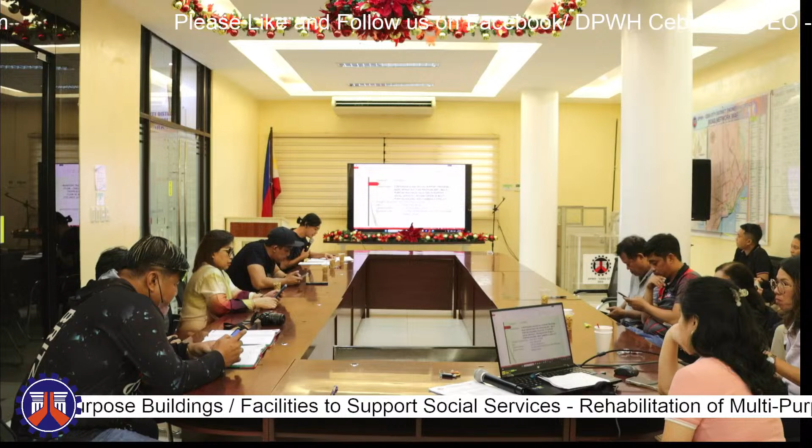And for the BAC TWG head, we have Evelyn C. Mansueto. TWG members: Francis C. Cañete, Elvira C. Fernandez, Kini Luis D. Mansueto, Marcelino S. Cortez, Alan M. Yaon Jr., Jimulad E. Talingting, Rinaldo B. Padillo, and Ma'am Corazon J. Amugis.

Okay, for the planning, we have Jan Silva, Jirelson Tan, Earl Anthony Yulin, Nessa Cañedo, Dayano Lasco, Nimar Tapik, Ralph Gamali, Ariel Cardosa, and Oriel Bacara.

Okay, for the participating contractors, for the construction firm, we have from Planac Construction, Mamalu Plantar. For Neo Ventures Construction, we have Sir Andrew Villeno. For the New Global Dev Corporation, we have Sir Jean Martin. Okay, that's all for the contractors.

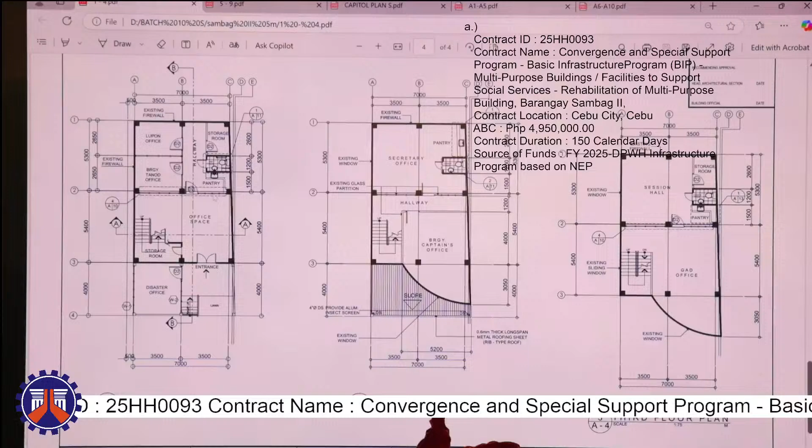For its scope of works, it contains the installation of the built-in cabinet at the ground floor office space, and installation of wall partitions at the ground floor, second floor, and third floor level. Next is removal and replacement of ceiling, incorporating electrical works, and then removal and replacement of CRs, all CRs from ground floor to third floor. And then extension of the second floor level for the Barangay Captain's Office.

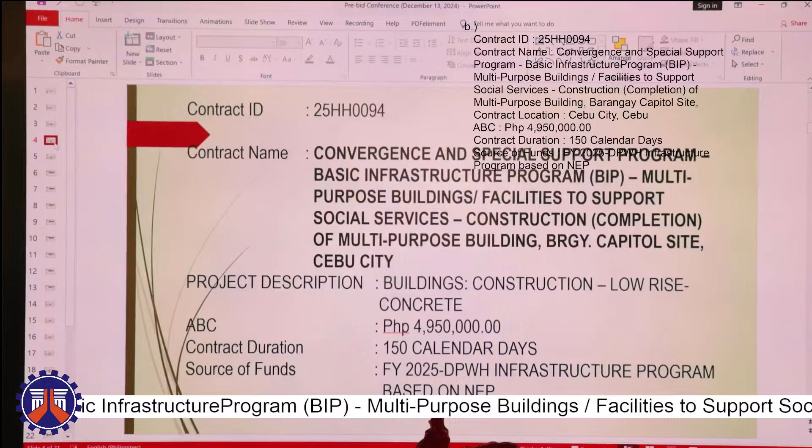So that's all for Barangay Sambag Dos. Next project, contract ID 25HH0094, with contract name Convergence and Special Support Program, Basic Infrastructure Program, multipurpose building facilities to support social services, construction completion of multipurpose building, Barangay Capitol Site, Cebu City. Project description, building construction, low-rise concrete, with approved budget contract 4,950,000. Contract duration is 150 calendar days, and its source of funds will be FY 2025 DPWH Infrastructure Program based on NEP.

So the location of this project is the Barangay Capitol Site Barangay Hall. Its main scope of works: installation of aluminum frame glass doors, swing type; aluminum glass windows, sliding type; aluminum glass windows awning; aluminum glass windows fixed type; and aluminum windows, wooden doors and railings at the roof deck.

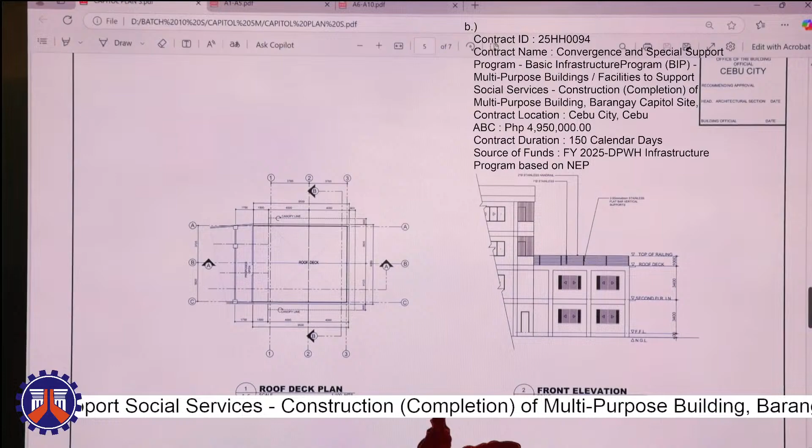So this area is enclosed. Currently it's open here, connecting to the existing barangay hall. Installation of railings at the third floor level. That's all for Barangay Capitol Site.

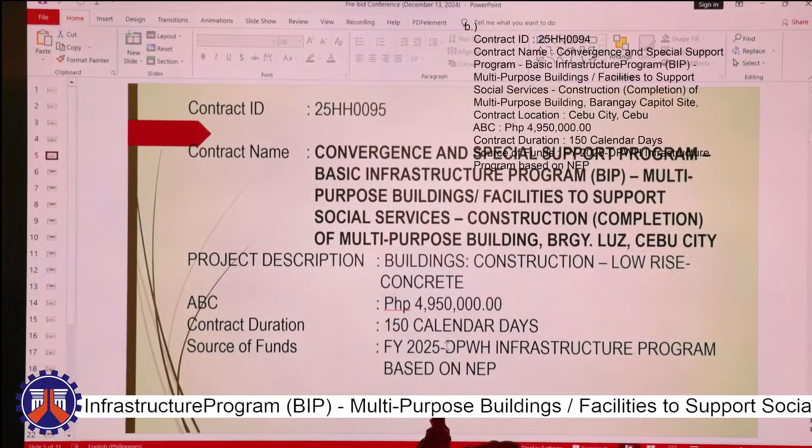Next, contract ID 25HH0095, with contract name Convergence and Special Support Program, Basic Infrastructure Program, multipurpose buildings facilities to support social services, construction completion of multipurpose building, Barangay Luz, Cebu City. With project description, construction low-rise concrete. With approved budget contract 4,950,000. Its contract duration is 150 calendar days, and source of funds will be FY 2025 DPWH Infrastructure Program based on NEP.

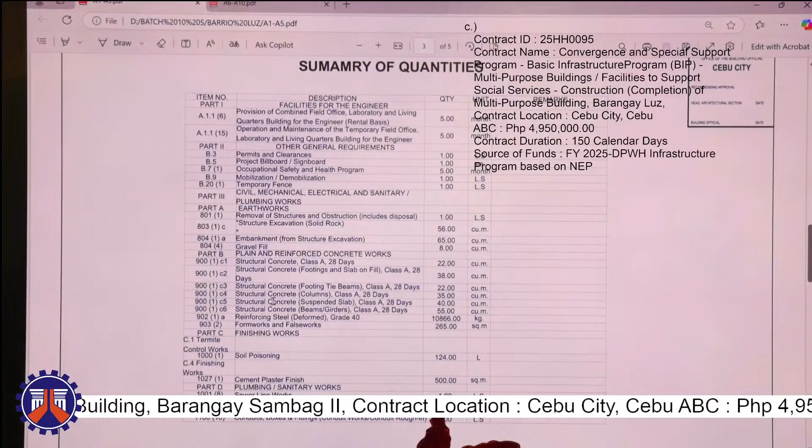For Barangay Luz, the project is located at the Barangay Luz Barangay Hall. Its main scope of works: removal of existing structures and obstruction, structure excavation, solid rock, embankment from structure excavation, and gravel fill. And for concrete works, you have structural concrete for footings and slab, structural concrete footing tie beams, structural concrete for columns, structural concrete for suspended slab, and structural concrete for beams and girders.

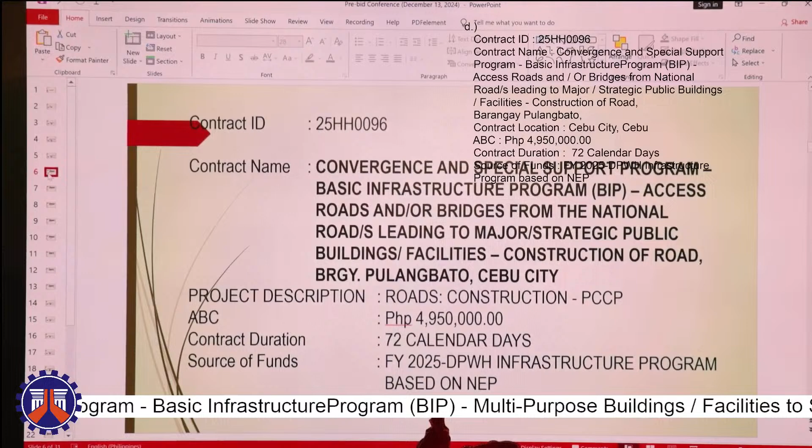Good morning. I'm here to discuss our next project with contract ID 25HH0096. Contract name, Convergence and Special Support Program, Basic Infrastructure Program, BIP, access roads and/or bridges from national roads leading to major strategic public buildings and facilities. Construction of road, Barangay Pulangbato, Cebu City. Project description, roads construction, PCCP. With the approved budget for the contract, 4,950,000. Our contract duration, 72 calendar days. Source of fund, FY 2025 DPWH Infrastructure Program based on NEP.

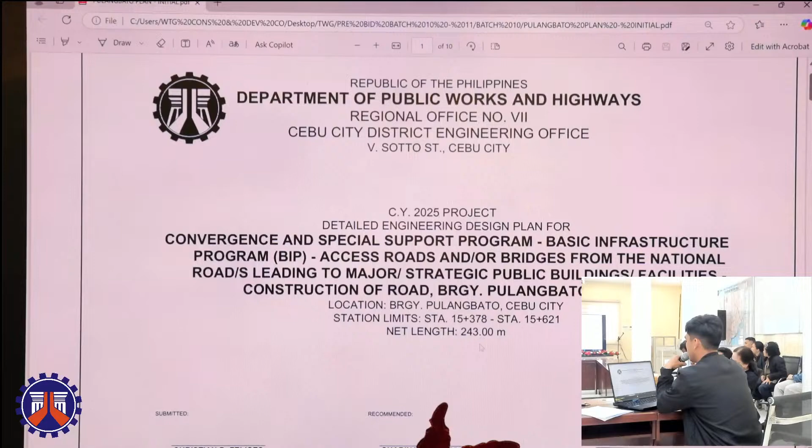The start of our project is the end of our 2024 Pulangbato FMR, and the end of our project is this one, the existing concrete road going to Barangay Guba. We have our exact coordinates for our start and end of our project.

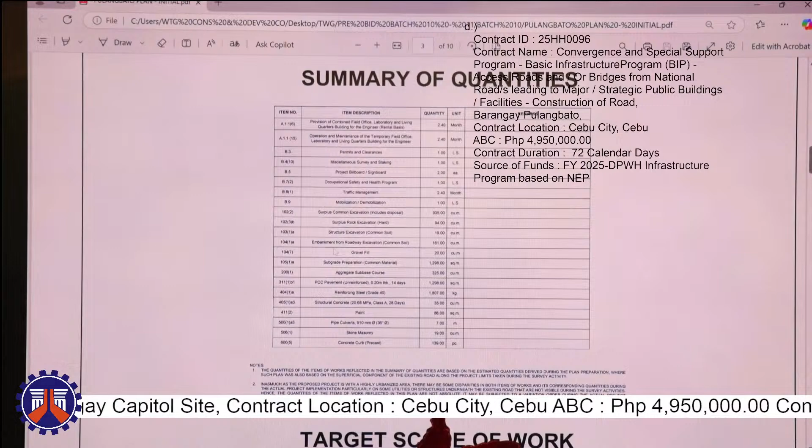These are our scope of works, the items involved in our project. We have our surplus excavation, structure excavation, embankment, gravel fill, subgrade preparation, aggregate sub-base course, PCCP 0.20m, 14 days, reinforcing steel grade 40, and structural concrete for our line canal. We also have paint for our curb, pipe culverts for our cross drain, stone masonry, and also concrete curb precast.

This one are general notes and technical specifications of the items involved in this project. And lastly, our typical road section. We have our concrete pavement here and our line canal at the right side.

Okay, that's all for Pulangbato. This connects to our FMR.

So the next project with the contract ID 25HH0097, with the contract name of Convergence and Special Support Program, Basic Infrastructure Program, BIP, access roads and/or bridges from the national roads leading to major strategic public buildings or facilities, construction of road, Barangay Binaliw, Cebu City. This project has approved budget of contract of 4,950,000 pesos and contract duration of 72 calendar days. The source of funds is FY 2025 DPWH Infrastructure Program based on NEP.

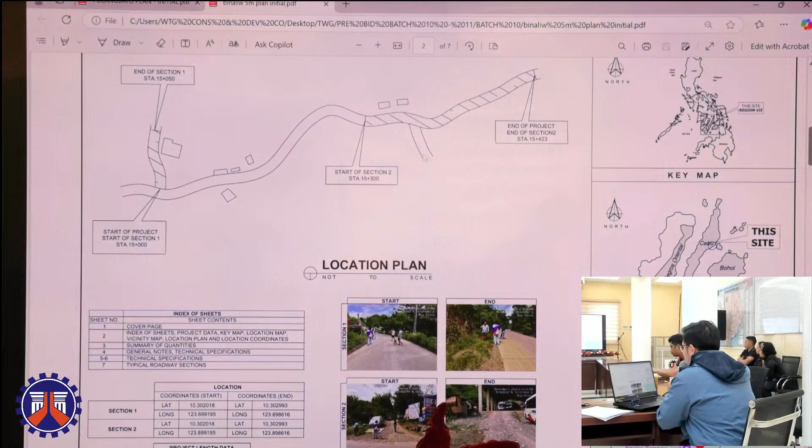So this is the location plan of the project. Section 1 is located beside the barangay hall in Binaliw, and the second section is 300 meters away from the first section. We also have the geotag pictures provided so that you can easily locate the project.

Then here we have the summary of quantities. First, we have removal of actual structures or obstruction, PCCP, 0.23 meters thick. Surplus common excavation, structure excavation, pipe culvert and drain excavation, embankment from roadway excavation, gravel fill, subgrade preparation, aggregate subbase course, PCCP pavement, 0.25 meters thick, 7 days.

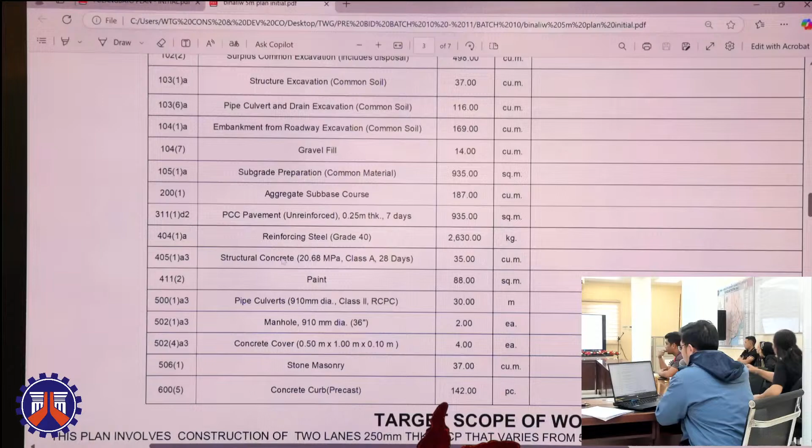For the drainage, we have reinforcing steel grade 40, structural concrete, 20.68 MPa, class A, 28 days. We have paint, pipe culverts, manhole, concrete cover, stone masonry, and concrete curb. Here we have the general notes and technical specifications of the project. And lastly, we have the typical roadway section with the roadway width of 5.6 meters.

So that's all for this project.

Next, with contract ID 25HH0098, Convergence and Special Support Program, Basic Infrastructure Program, access roads and/or bridges from the national roads leading to major strategic public buildings, facilities, construction of road, Barangay Mabolo, Cebu City, with an ABC of 4.95 million and a contract duration of 72 calendar days.

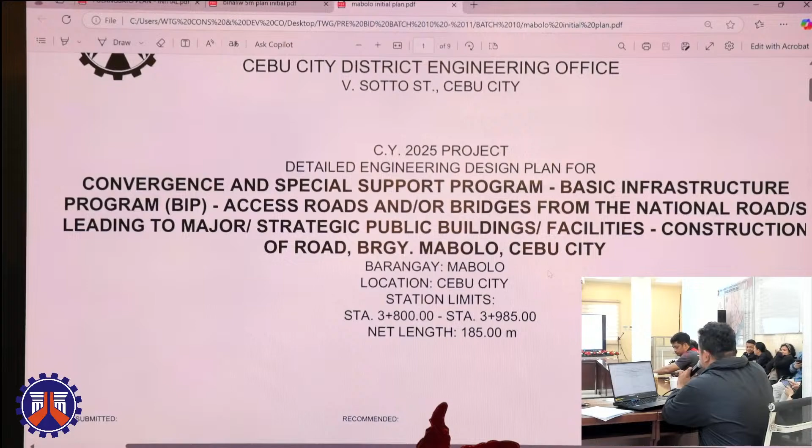The station limits of the project is from 3,800 to 3,985, with a net length of 185 meters. And this is the location map of the project, and coordinates are provided as well to easily determine the start and end.

This is the summary of quantities of the project. The major scope of work being removal of PCCP, removal of existing sidewalk, removal of existing concrete, surplus common excavation, subgrade preparation, aggregate subbase course, PCCP, paint, curb and gutter, and provision of sidewalk.

This is the general notes and technical specifications of the project. And this will be the typical roadway section.

Good morning, everyone. I'm here to discuss the project with the contract ID 25HH0099, with contract name Convergence and Special Support Program, Basic Infrastructure Program, access roads and/or bridges from the national roads leading to major or strategic public buildings or facilities, construction of road, Barangay Sirao, Cebu City.

Its project description is roads construction of PCCP with an approved budget of 4,950,000 pesos. Its contract duration is 72 calendar days, and its source of funds is FY 2025 DPWH Infrastructure Program based on NEP.

So here is our plan, and its station limits starts from station 17 plus 800 until station 17 plus 975, with a net length of 175 meters. Here you can see the location of our project with its coordinates as well as its total length.

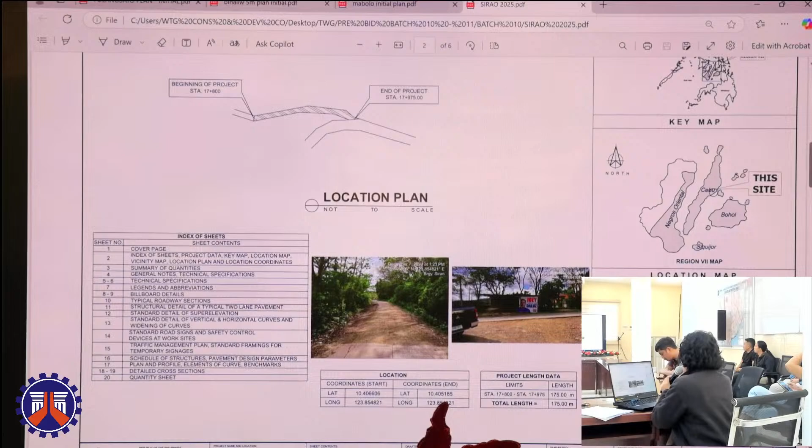So here is our summary of quantities with its major scope of works, including surplus common excavation, structure excavation, pipe culvert and drain excavation, gravel fill, subgrade preparation, aggregate subbase course, PCCP 0.2 meter thick, 14 days, reinforcing steel grade 40, structural concrete, paint, pipe culverts, stone masonry, and concrete curb precast.

Here you will see the general notes and technical specifications included in this project. And this is our typical road section. There is a proposed drainage for both sides of the road, and its carriageway width is 5.6 meters.

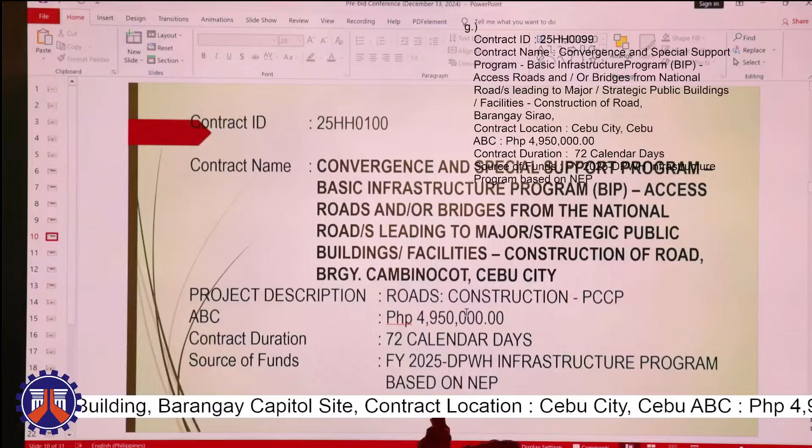So the next project I will be discussing is the project with the contract ID 25HH0100, with its contract name Convergence and Special Support Program, Basic Infrastructure Program, Access Roads and or Bridges from the national roads leading to major or strategic public buildings or facilities, construction of road, Barangay Cambinocot, Cebu City. Project description is roads construction PCCP. Approved budget is also 4,950,000 pesos. Its contract duration is 72 calendar days as well. And its source of funds is FY 2025 DPWH Infrastructure Program based on NEP.

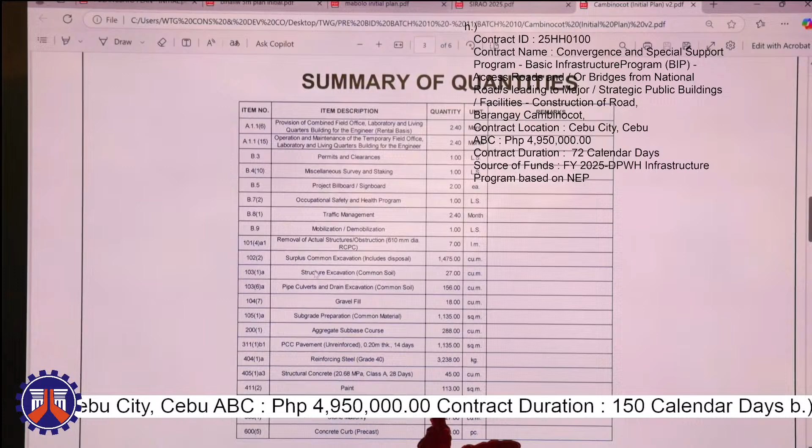The major scope of works for this project includes removal of RCPC, surplus common excavation, structure excavation, pipe culverts and drain excavation, gravel fill, subgrade preparation, aggregate sub-base course, PCCP 0.2 meter thick, 14 days, reinforcing steel grade 40, structural concrete, paint for our curb, pipe culverts, stone masonry, and concrete curb precast.

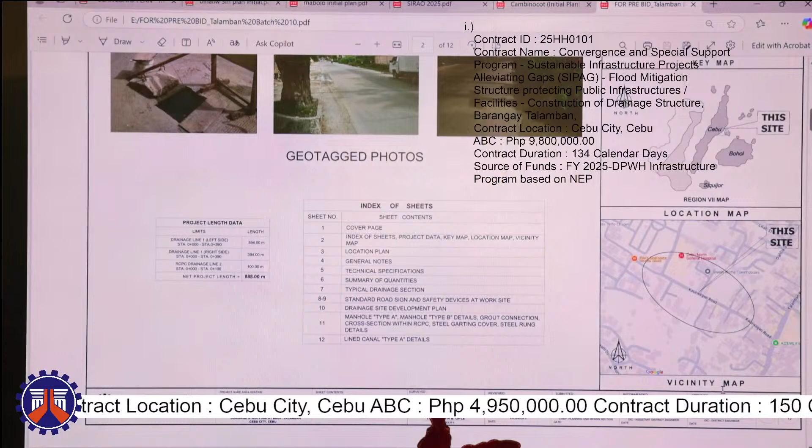And as you can see here, we have the vicinity map wherein you can locate the project in Kauswagan Road at Cebu North General Hospital.

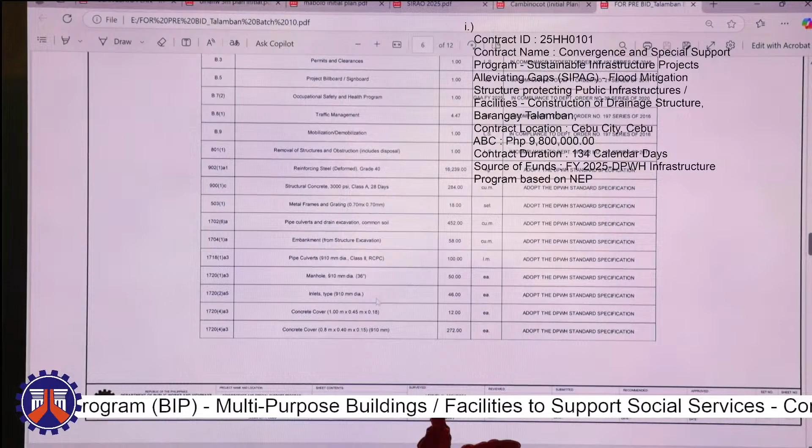Furthermore, for the major scope of works for this project, we have item 801(1), removal of structures and obstruction, reinforcing steel, structural concrete, metal frames and gratings, pipe culverts and drain excavation, embankment, pipe culverts, 910 mm diameter, manhole, inlets, concrete cover.

Next, we have Barangay Mabulo. Pit-os. Okay.

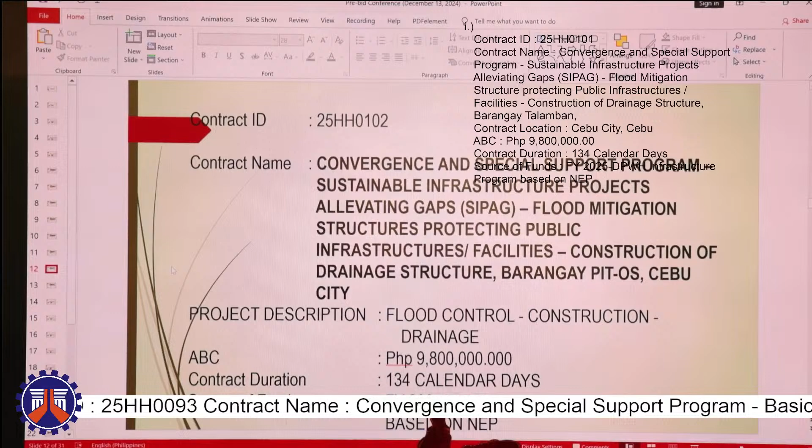So, good morning, everyone. I will be the one to discuss the contract ID 25HH0102, Convergence and Special Support Program, Sustainable Infrastructure Projects Alleviating Gaps, Flood Mitigation Structures Protecting Public Infrastructures Facilities, Construction of Drainage Structure, Barangay Pit-os, Cebu City. Project description, flood control construction drainage with an ABC amount of 9.8 million, contract duration 134 calendar days, source of funds FY 2025 DPWH, infrastructure program based on NEP.

So for this project, the location is Barangay Pit-os, Cebu City, mainly at Villa del Rio 2. So we have drainage line 1 and 2. For line 1, we have 393 meters. Line 2, 390 meters, total of 783. So the coordinates for the location is also provided.

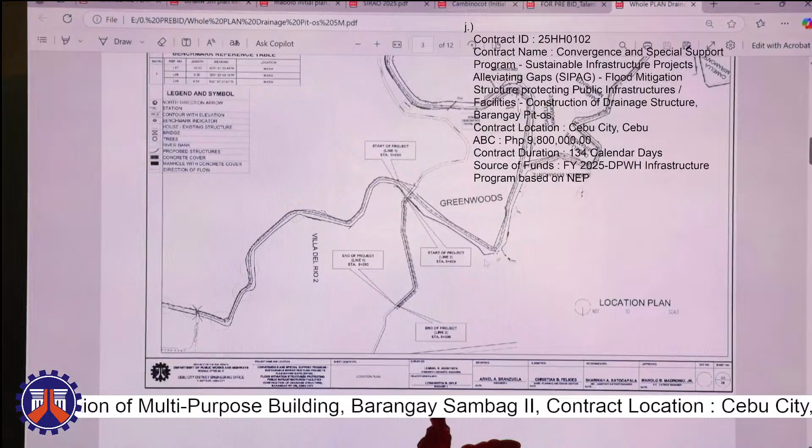Then for the scope of work, we have structural concrete, reinforcing steel, metal frames and gratings, curb and gutter, shoring, manhole inlets, and concrete cover for the lined canal as the design of this project. So the details of the lined canal is also provided in the plan. So that's all.

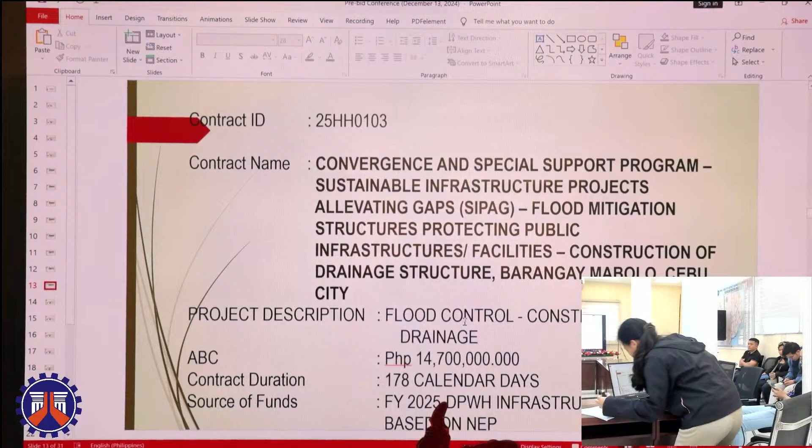Everyone, I'm here to discuss the contract ID 25HH0103 with the contract name Convergence and Special Support Programs, Sustainable Infrastructure Projects, Alleviating Gaps, SIPAG, flood mitigation, structures protecting public infrastructures, facilities, construction of drainage structure, Barangay Mabolo, Cebu City.

Project's description is flood control construction of drainage with ABC 14,700,000 pesos with a contract duration of 178 calendar days. The source of funds is FY 2025 DPWH infrastructure program based on NEP.

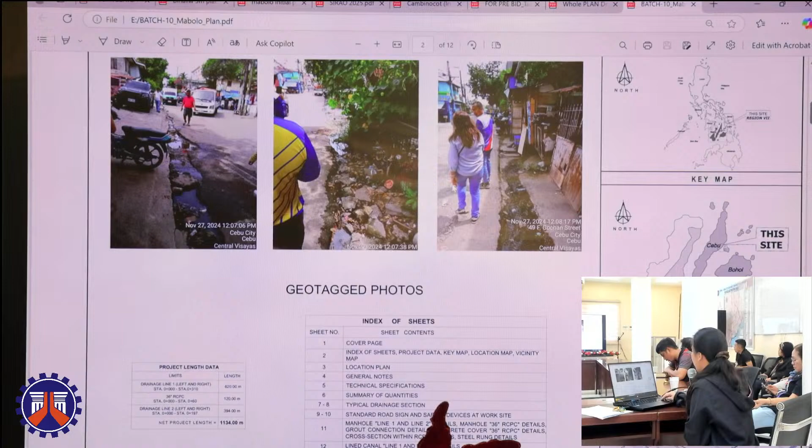This is our location with geotagged photos, and the site is located along 49 E Gochan Street and Tres Borces Padres Street. This is the general notes and technical specifications.

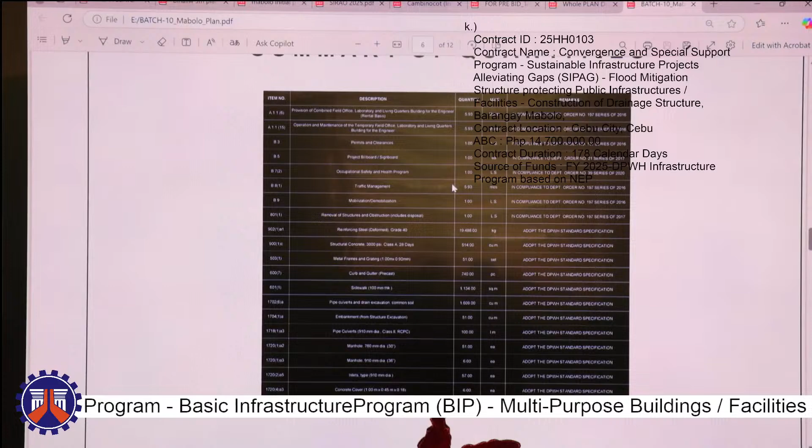For the main scope of works: removal of structures and obstructions including disposal, reinforcing steel deformed grade 40, structural concrete 3000 PSI class A 28 days, metal frames and grating, curb and gutter precast, sidewalk, pipe culverts and drain excavation, common soil, embankment from structure excavation, pipe culverts, manhole 910 mm dia, and inlets, concrete cover for line 1 and concrete cover for line 2.

This is our typical drainage section details for line 1 and 2, and this is for 36 inches RCPC section. And this is our road work, road signs and safety. And this is our manhole details and concrete cover for lined canal. Thank you.

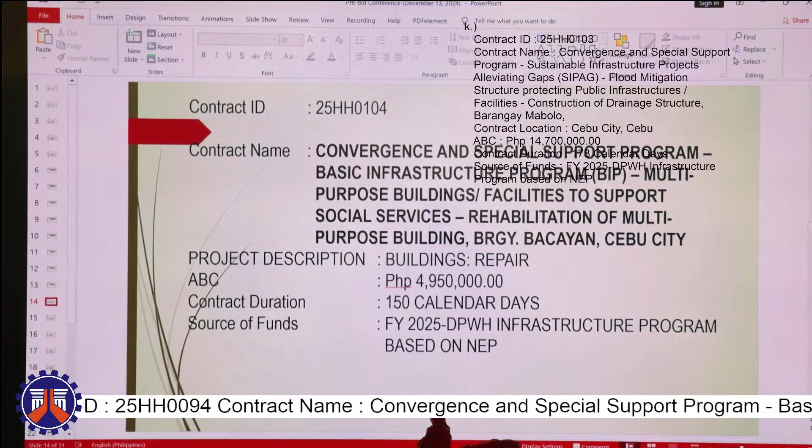Next project, contract ID 25HH0104, contract name Convergence and Special Support Program, Basic Infrastructure Program BIP, multipurpose building facilities to support social services, rehabilitation of multipurpose building, Barangay Bacayan, Cebu City, with project description, building repair. ABC amount is 4,950,000. Its contract duration is 150 calendar days, and source of funds will be FY 2025 DPWH infrastructure program based on NEP.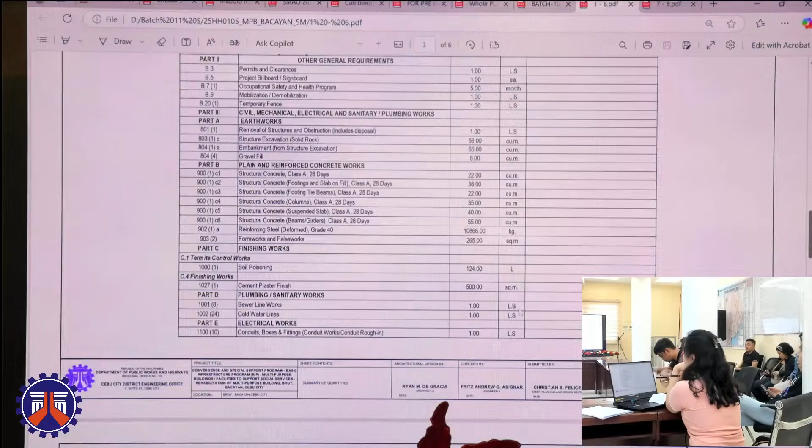For Barangay Bacayan, the project will be at the Barangay Bacayan gym or covered court. So for its scope of works, there is a proposed retaining wall, and then proposed new flooring sa likod sa existing bleachers. And then the proposed new gate to access the playground.

Also, gate connecting to existing, sorry. Also, removal and replacement of the existing main gate of the covered court. And then rubberized painting for the whole area of the basketball court.

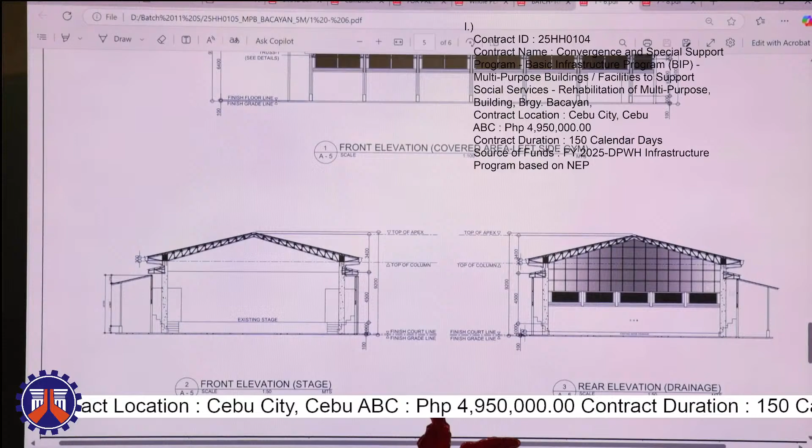And next will be the installation of louvers at the rear elevation, and painting of the steel trusses. That's all for Barangay Bacayan.

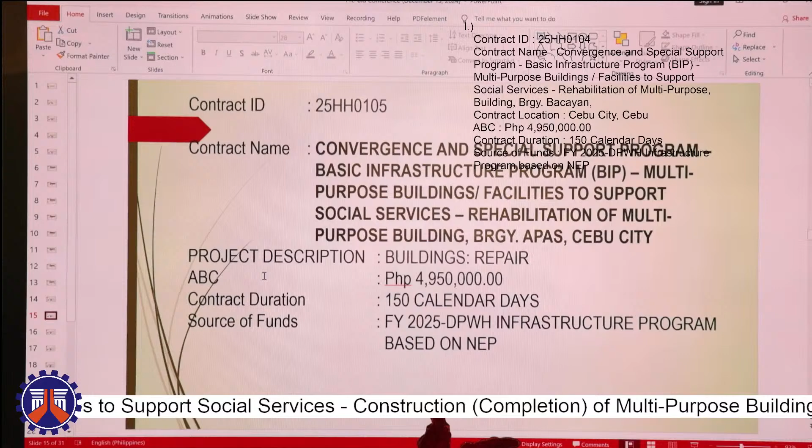Next is contract ID 25HH0105. Contract name, Convergence and Special Support Program, Basic Infrastructure Program, Multipurpose Buildings, Facilities to Support Social Services, Rehabilitation of Multipurpose Building, Barangay Apas. Project description is building repair. ABC amount is 4,950,000. Contract duration is 150 calendar days. And its source of funds will be FY 2025 DPWH Infrastructure Program based on NEP.

The project is located at Barangay Apas, Barangay Hall. So there will be an installation of roll-up doors and installation of walls at the ground floor or parking space area. Also painting of interior and exterior walls, ground, second, third, and fourth floor, up to roof deck.

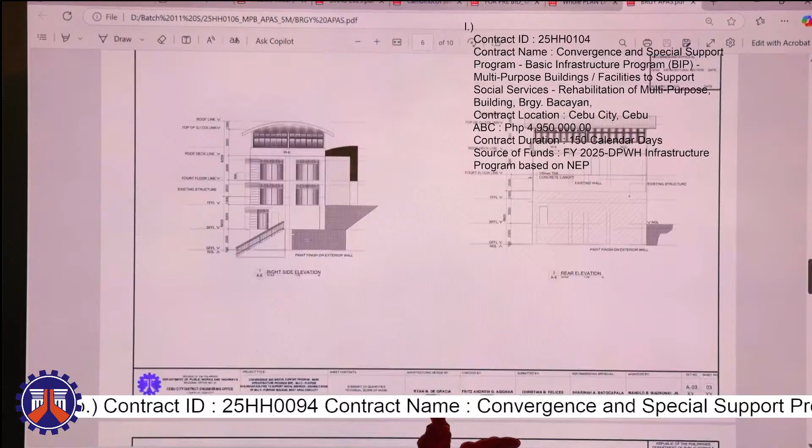Next is to enclose the roof deck area with windows, fixed and awning windows, and then painting of exterior walls, and also for electrical works, remove and replace all lighting fixtures. That's all for Barangay Apas.

Next is contract ID 25HH0106, contract name, Convergence and Special Support Program, Basic Infrastructure Program, Multipurpose Building, Facilities to Support Social Services, Rehabilitation of Multipurpose Building, Barangay Banilad, with project description, building repair. ABC amount is 4,950,000. Contract duration is 150 calendar days, and source of funds, FY 2025 DPWH Infrastructure Program based on NEP.

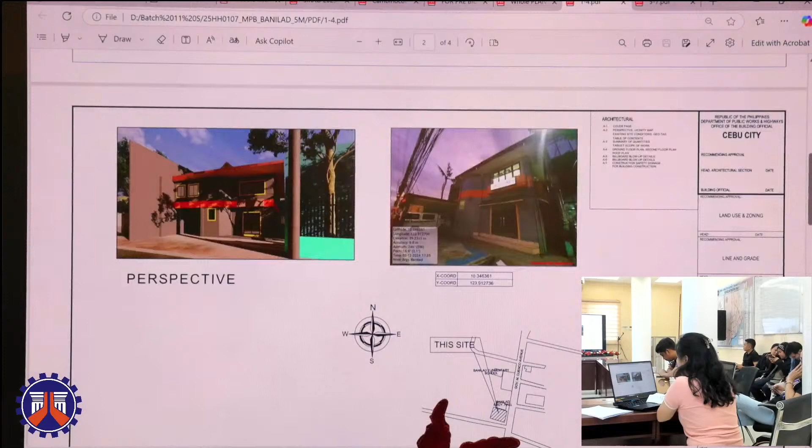For Barangay Banilad, the location of the project will be at the Barangay Hall, mainly at the daycare and dental area of the building. So there will be installation of wall partitions here in the ground floor area and also on the second floor for daycare. And then sa second floor for the dental clinic, doctor's clinic, and the receiving area. And also to provide room for the nurses.

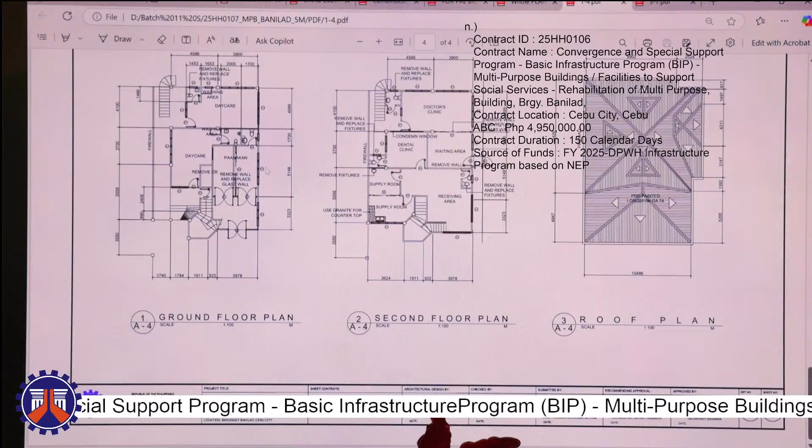There will also be removal and replacement of tiles for the stairs. And also the removal of wall and replacement of the existing fixtures. So that's all for Barangay Banilad.

Next, contract ID 25HH0107, Convergence and Special Support Program, Basic Infrastructure Program, Multipurpose Buildings Facilities to support social services. Construction of multipurpose building, Barangay Malubog, Cebu City. With project description, construction of low-rise concrete. ABC amount is 4,950,000 with contract duration 150 calendar days. Its source of funds will be FY 2025 DPWH Infrastructure Program based on NEP.

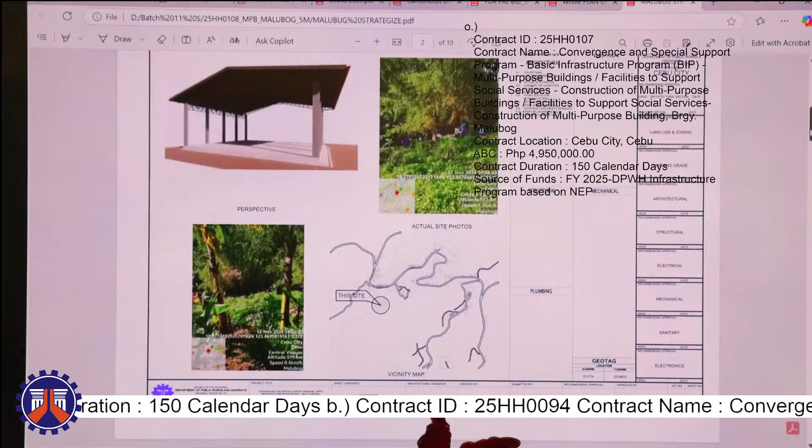For Barangay Malubog, this is a construction of a new covered court. So, a geotag is provided here since dili siya duol sa ilang barangay hall. So, the main scope of works, removal of structures and obstruction, structure excavation, and then lean concrete.

Next is structural concrete for the septic tank, cistern, and ramp, stairs, and canopy. Next is the footing and slab on fill. Next is structural concrete for footing, tie beams, columns, suspended slab, beams and girders, and also for the reinforcing steel deformed grade 40.

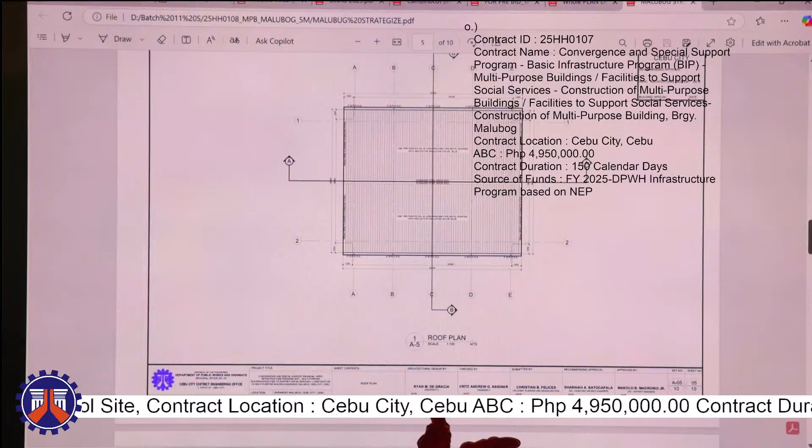So it has 5 bays. So this is the roof plan of the covered court. The front elevation, the rear, the left and right side. That's all for Barangay Malubog.

Next, contract ID 25HH0108, Convergence Special Support Program, Multipurpose Building Facilities to support social services, construction completion of Multipurpose Building Package A, Barangay Labangon, Cebu City. Project description is construction low-rise concrete. Approved budget contract is 4,950,000 with contract duration 150 calendar days. Source of funds is FY 2025 DPWH Infrastructure Program based on NEP.

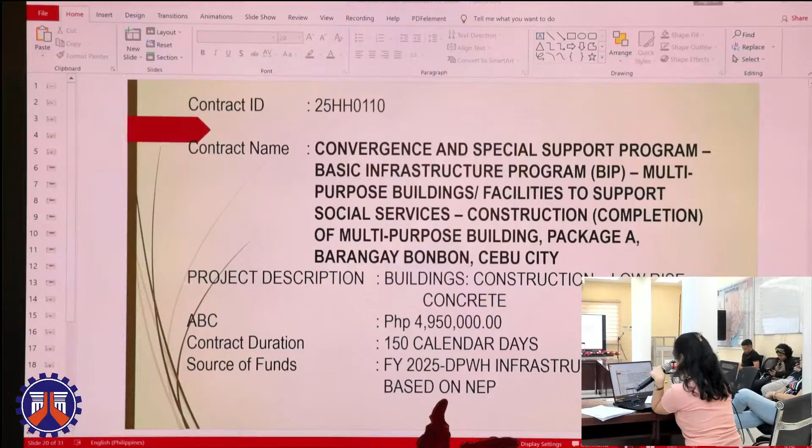So for Barangay Labangon, this is a construction completion of their covered court. Same also, the main scope of works consists of structural works such as removal of structures, structural excavation, embankment, and gravel fill, structural concrete footings and slabs, structural concrete for columns, structural concrete for beams and girders, and reinforcing steel deformed grade 40, also for formworks. And then electrical works, installation of conduits, wirings, and lighting fixtures for the covered court.

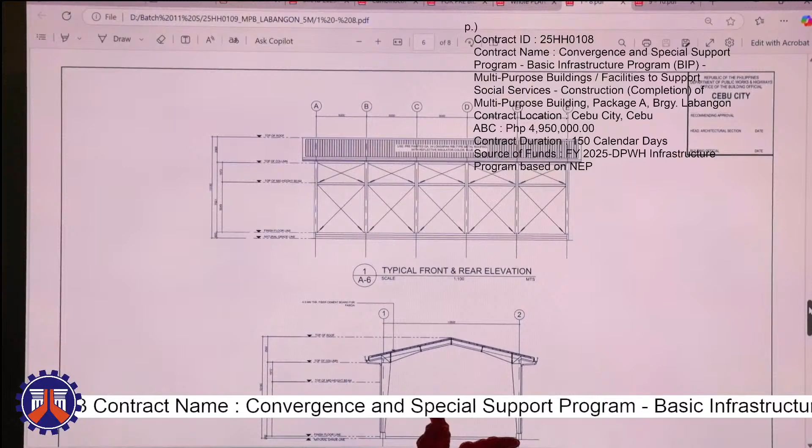This is the roof plan. So this is the new plan for the covered court. Steel siya yung main members. That's all for Barangay Labangon. Thank you.

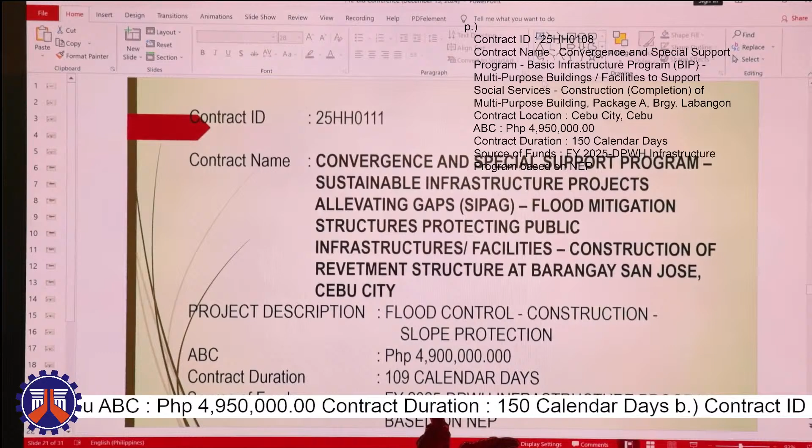So for the drainage project, revetment project, we have 25HH0111, Convergence and Special Support Program, Sustainable Infrastructure Projects, Alleviating Gaps, Flood Mitigation Structures, Protecting Public Infrastructure Facilities, Construction of Revetment Structure at Barangay San Jose, Cebu City, with a project description of flood control construction slope protection, and ABC amount of 4.9 million, 109 calendar days, FY 2025 DPWH Infrastructure Program based on NEP as source of funds.

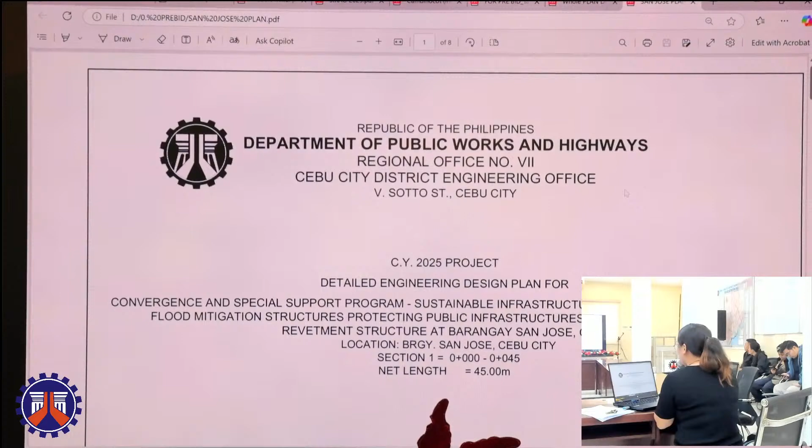So for this project, we have location section 1, 0+000 to 0+045, total net length of 45 meters. So the project is within Barangay San Jose. FMR project ni siya nga na ay slope protection. Then musumpay lang ni. Then also coordinates provided sa location. Then the scope of work aims to provide slope protection structure, section 1, with total length of 45 meters, composed of reinforcing steel, structural concrete, and stone masonry. That's all for the San Jose project.

The next is 25HH0112, Convergence and Special Support Program, Basic Infrastructure Program, Flood Mitigation Structures, Protecting Public Infrastructure Facilities, Construction of Flood Mitigation Structure, Barangay Santa Cruz, Cebu City, Flood Control, Construction Drainage, with 4.950 million as ABC amount, contract duration 109 calendar days, source of funds FY 2025 DPWH Infrastructure Program based on NEP.

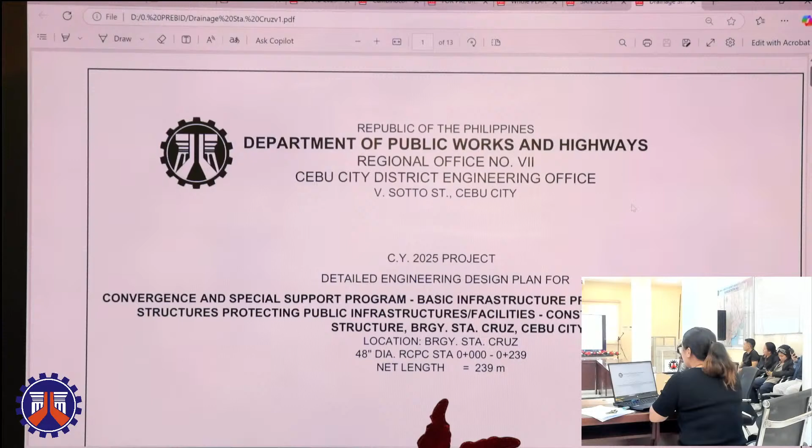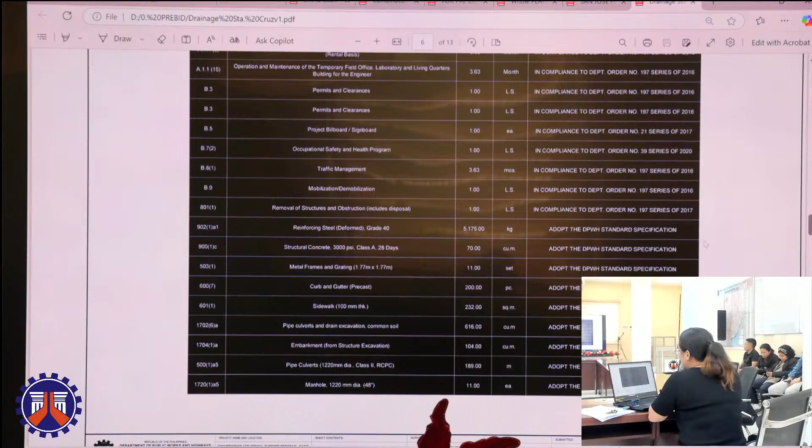So this project is located corner Ramos, kilid siya sa City Suites. Then the project's scope of work is 48 diameter RCPC station 0 to 239, total length of 239 meters. So this project is along Junquera extension. Ang start sa project is the City Suites until corner Pelaez extension. So mo ni siya F. Ramos going here. Then for the summary of quantities, we have reinforcing steel, structural concrete, metal frames and grating, curb and gutter, sidewalk, embankment, and manhole. So details are also provided, this one.

Then for the next project, we have 25HH0114, Convergence and Special Support Program, Basic Infrastructure Program, Flood Mitigation Structures, Protecting Public Infrastructure Facilities, Construction of Flood Mitigation Structure, Barangay Carreta, Cebu City. Project description, flood control, construction drainage. ABC amount 4,950,000. Contract duration 109 calendar days. Source of funds FY 2025 DPWH Infrastructure Program based on NEP.

So this project is located at bang sa Bureau of Quarantine dinha sa Jan Maxilum, kilid sa Barangay Hall sa Carreta. Then we have 3 drainage lines, line 1 110 meters, line 2 76, line 3 164 meters, total of 350 meters. So the coordinates of the location are also provided. So this is the location plan. Muna siyang BOQ, Bureau of Quarantine, at Bangaskina.

Then for the scope of work, structural concrete, reinforcing steel, metal frames and grating, shoring, manhole and concrete cover. So mo ni siya ang iyahang design, lined canal. So that's all. Thank you.

Good morning, everyone. I'm Engineer Gamali, and I'm here to discuss the project with the contract ID 25HH0113, with the contract name of Convergence and Special Support Program, Basic Infrastructure Program (BIP), Flood Mitigation Structures Protecting Public Infrastructure Facilities, Construction of Flood Mitigation Structure, Barangay Agsungot, Cebu City. Project description is flood control construction of drainage with an ABC amount of 4,950,000 pesos. Contract duration is 109 calendar days, and source of funds is FY 2025 DPWH Infrastructure Program based on NEP.

Again, the location is situated at Barangay Agsungot with the station limits 00 to 043.90 with a net length of 43.90 meters. For correction, this is not a drainage, this is a revetment structure. And here are geotag photos seen with the alignment and the coordinates to specify with the index of sheets.

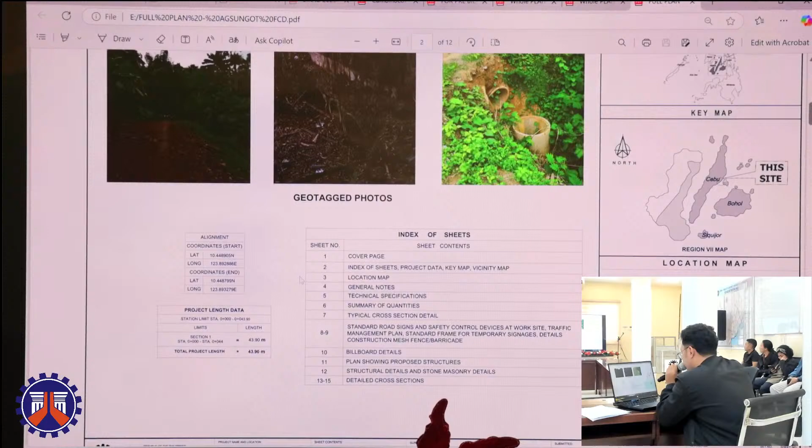Here is the location plan. As you can see, on the left side is towards Agsungot, and on the right is Cambinocot. Stations start at 00, then to 43.90 meters. For the scope of work, it has a reinforcing steel, grade 40, a structural concrete 3,000 PSI, Class A, 28 days, pipe culverts and drain excavation, and common soil, and stone masonry.

Here is a typical cross-sectional detail. As you can see, this is a proposed head wall, stone masonry, proposed slope protection structure, and with a carriageway width along its right section. Here are the schedule of structures and the typicals for the details of beam, footings, columns, and stone masonries. That'll be all for this project.

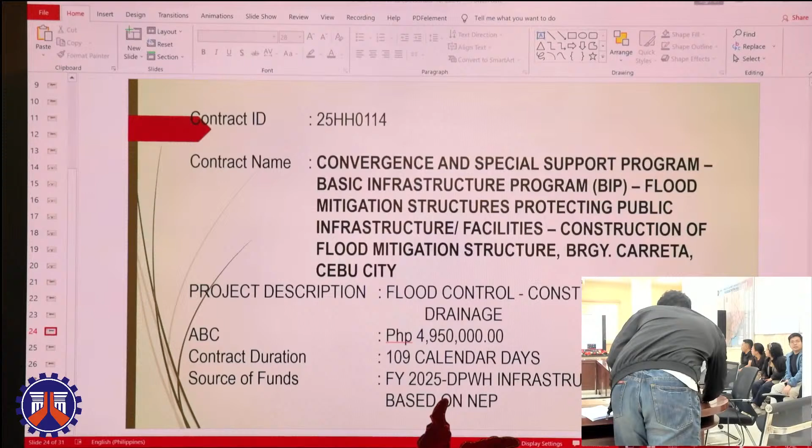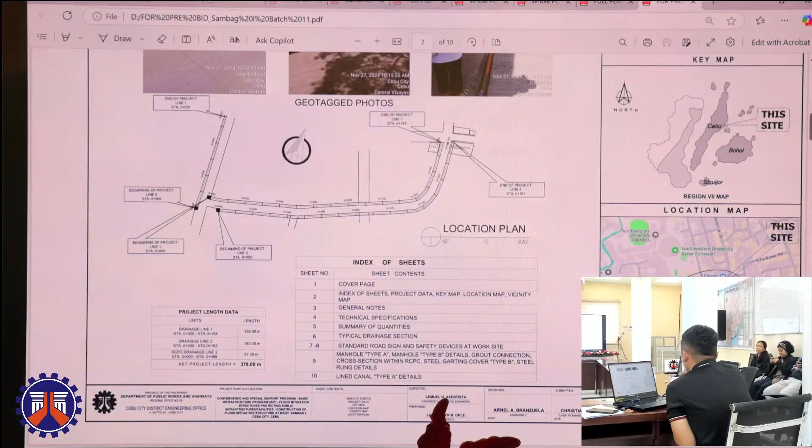So for the plan, we have 3 lines here. For line 1, we have station limits from 00 to 158 meters. For line 2, we have station 00 to 163 meters. For line 3, we have 00 to 57 meters with a total net length of 378. So for the next page, we have the geotag photos and location plan. So for this project, you can locate this project at Southwestern University PHINMA, to across AB Aznar Street. So we have here the general notes for this project and also the technical specifications.

For the summary of quantities, we have the major scope of works here. We have the removal of structures and obstruction, reinforcing steel, structural concrete, metal frames and grating, pipe culverts and drain excavation, embankment, pipe culverts, manhole, and concrete cover. So we have here the typical drainage section details and also the details for manhole and lined canal. So that would be all for this project. Next we have Barangay Ermita.

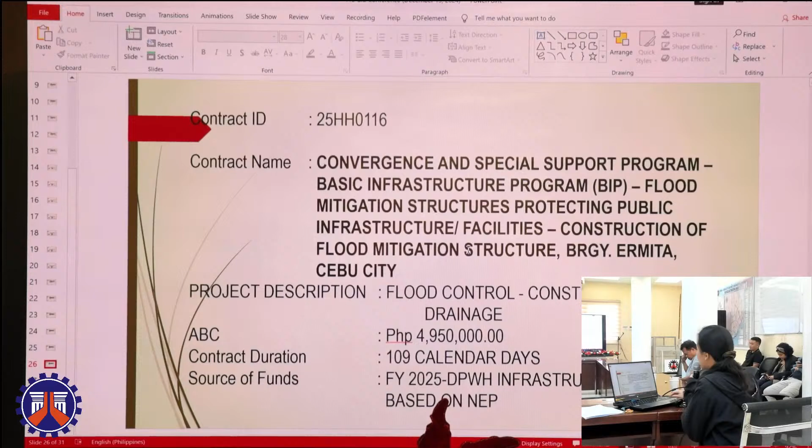Hello everyone. I'm here to discuss the contract ID 25HH0116 with the contract name Convergence and Special Support Program, Basic Infrastructure Program, BIP, Flood Mitigation Structures Protecting Public Infrastructure Facilities, Construction of Flood Mitigation Structure at Barangay Ermita, Cebu City, with the project description of flood control, construction, drainage, with an ABC amount of 4,950,000 pesos with a contract duration of 109 calendar days. The source of funds is FY 2025 DPWH Infrastructure Program based on NEP.

So for the Barangay Ermita, line 1 station starts from 00 to 300 meters. Line 2 starts from 00 to 260 meters with a total net length of 560 meters. The location plan is mainly located on the covered court or the Barangay Hall of Ermita. For general notes, and this the technical specifications, and for the summary of quantities or the scope of works,

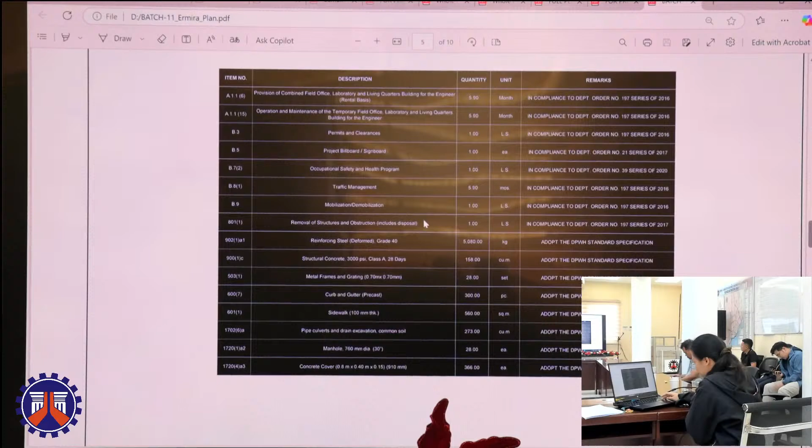the removal of structure and obstructions includes disposal, reinforcing steel deformed, grade 40, structural concrete 3000 PSI, class A 28 days, metal frames and gratings, curb and gutter, precast, sidewalk at 100 mm thick, and pipe culverts and drain excavation of common soil for manhole and from manhole for 30 inches diameter, and concrete cover for line canal. And this is the typical carriageway, typical drainage section, for line 1 and line 2. And next is the details of the manhole for line 1 and line 2 and line canal details. That's all.

Next is the Barangay Toong. For the contract ID 24HH117, Convergence and Special Support Program, Sustainable Infrastructure Projects, Alleviating Gaps, SIPAG, Flood Mitigation Structures, protecting public infrastructure facilities, construction of revetment along Bulacao River, Barangay Toong, Cebu City. Project description, flood control, construction, slope protection with an ABC amount of 39,200,000. Contract duration, 222 calendar days. Source of funds, FY 2025 DPWH Infrastructure Program based on NEP.

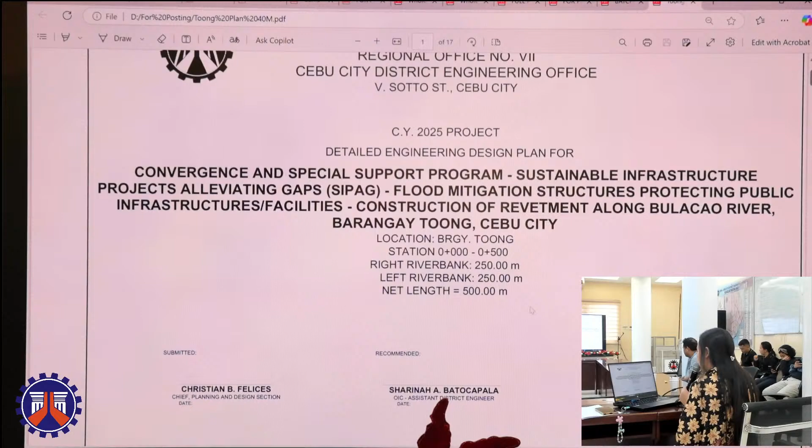So, the project is located along Bulacao River, specifically at Barangay Toong. So we have station limits of station 0 to 500, and we have a right river bank length of 250 and a left river bank of 250 with a total net length of 500. So the geotag photos are also provided on the plan for the location of the project.

The major scope of work of this project is: we have a concrete slope protection, a reinforced concrete slope protection. We have structural steel sheet piles, and we also have grouted riprap for the embankment. We have structural concrete and reinforcing steel bars.

We also have removal of structures and obstructions. We have channel excavation. We also provided geotechnical exploration on this project. So details of the structures for the scope of work of the project are provided in the plan. So that's all for this project.

Good noon. So, contract ID 25HH0118 with contract name Protect Lives and Properties Against Major Floods, Flood Management Program, Construction Rehabilitation of Flood Mitigation Facilities within major river basins and principal rivers, construction of revetment structure along Mananga River, Barangay Bonbon, Cebu City.

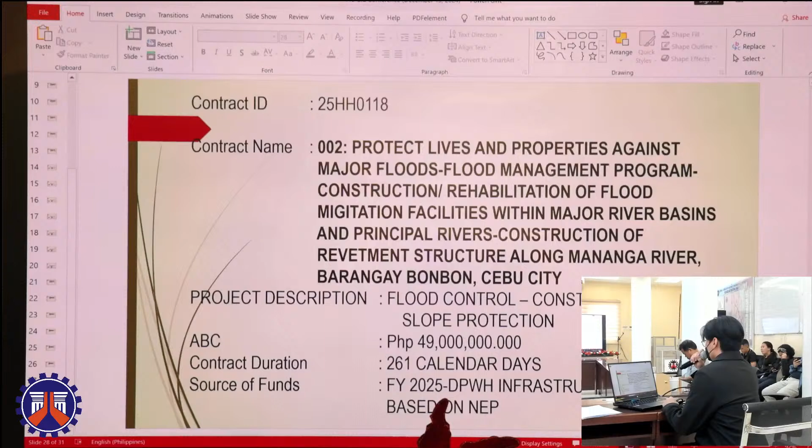Project description, flood control construction slope protection with an approved budget for the contract of 49 million. Contract duration 261 calendar days. Source of funds FY 2025 DPWH Infrastructure Program based on NEP.

So again, the location is along Mananga River, Barangay Bonbon, with station limits of 0 to 1,560. Right river bank length is 220 meters. Left river bank length is 236 meters, with a total length of 456 meters. So these are the geotag photos, vicinity maps, sketch map, index of sheets and project land data. The coordinates are also provided.

So this is the location plan. So this is actually an extension of the 2025 project from Bonbon also. So we are just extending it. So this is the RC dike, the end, and this is the start of the project. And we'll also provide the U-ditch, which will end here.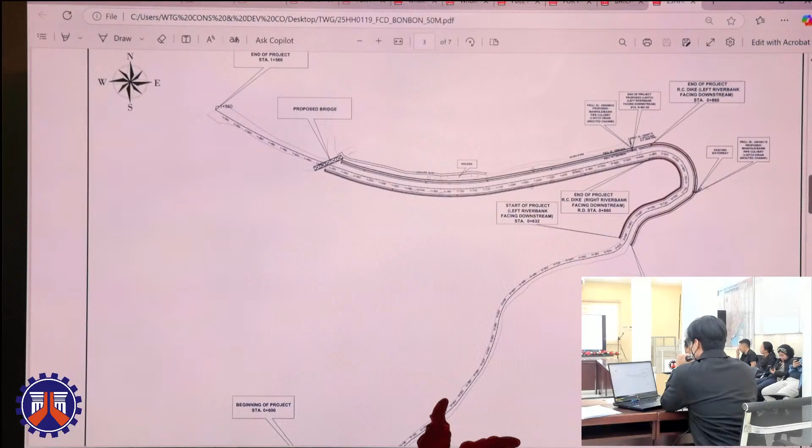For the summary of quantities, we have major items of reinforced concrete slope protection and grouted riprap. And these are the typical cross sections and the bid bulletin details. We also have the profile section with the location of the river plan. That's all for this project. Thank you.

Next, with the contract ID 25HH0119, Convergence and Special Support Program, Sustainable Infrastructure Projects Alleviating Gaps or SIPAG, Access Roads and/or Bridges from the national roads leading to major strategic public buildings, facilities, construction of road including slope protection structure, Barangay Agsungot, Cebu City, with an ABC amount of 49 million and a contract duration of 299 calendar days.

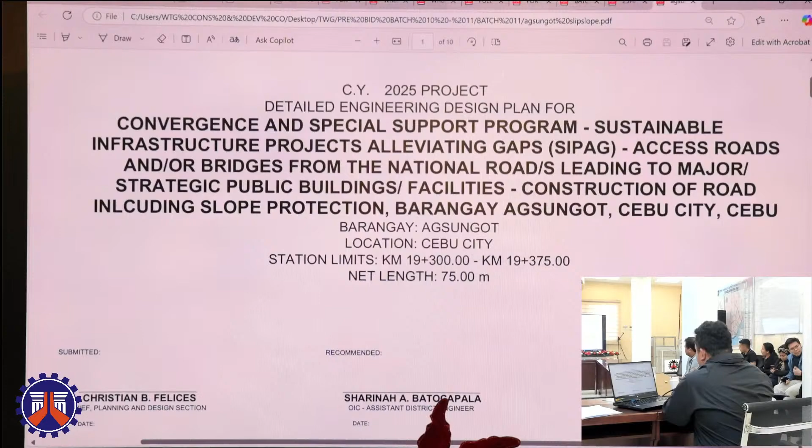The station limits of the project are at kilometer 19,300 to kilometer 19,375 with a net length of 75 meters. And this is the location of the project. The start and end with the specific coordinates of the project. And this is the summary of quantities. The major scope of work includes the following, and then these are their specific quantities.

The next page shows the general notes and the technical specifications. And this would be the typical section of the project.

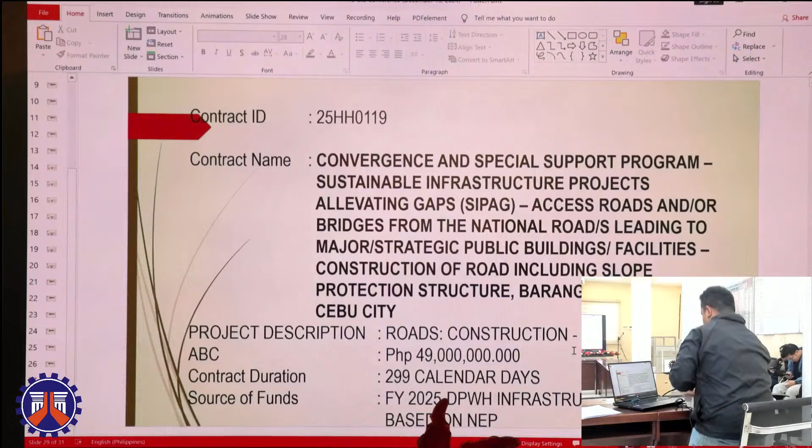So the next project, with a contract ID of 25HH0120, with a contract name of 001 Ensure Safe and Reliable National Road System, Asset Preservation Program, Preventive Maintenance, Tertiary Roads, Cebu Circumferential Road, Salvador Street, with section ID 66CB, chainage 00 to chainage 57, and chainage 57 to chainage 1777, and section ID 67CB with chainage 00 to chainage 688, Cebu City.

Project description, roads rehabilitation, with an approved budget for the contract of 49 million pesos, with a contract duration of 161 calendar days. Then lastly, source of funds, FY 2025 DPWH Infrastructure Program based on NEP. So this is the location plan of the project. It starts in Guadalupe, Jollibee, and we also have the geotag pictures so that you can easily locate the project.

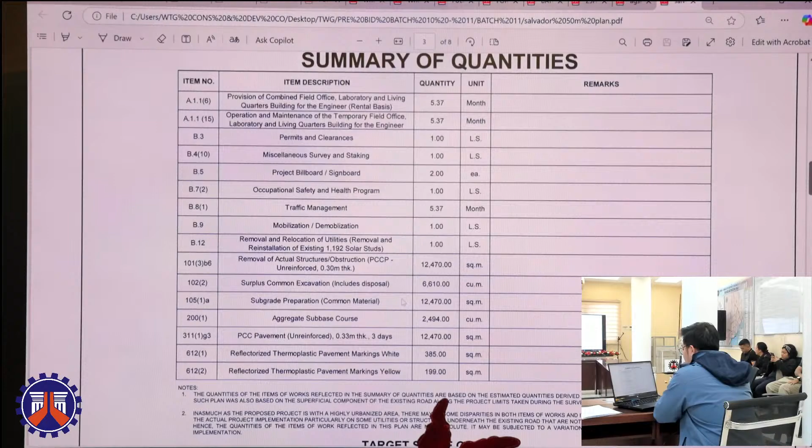It has a total net length of 2,465 meters. Then for the summary of quantities, we have removal of actual structures or obstruction, PCCP unreinforced 0.30 meters thick, surplus common excavation, subgrade preparation, aggregate sub-base course, PCCP unreinforced 0.33 meters thick, 3 days, and we also have reflectorized thermoplastic pavement markings, white and yellow.

Here we have the general notes and specific technical specifications for this project. And lastly, we have the typical roadway section. The width of the road is 13.4 meters. And we also have left side only with 6.8 meters width. That's all for this project.

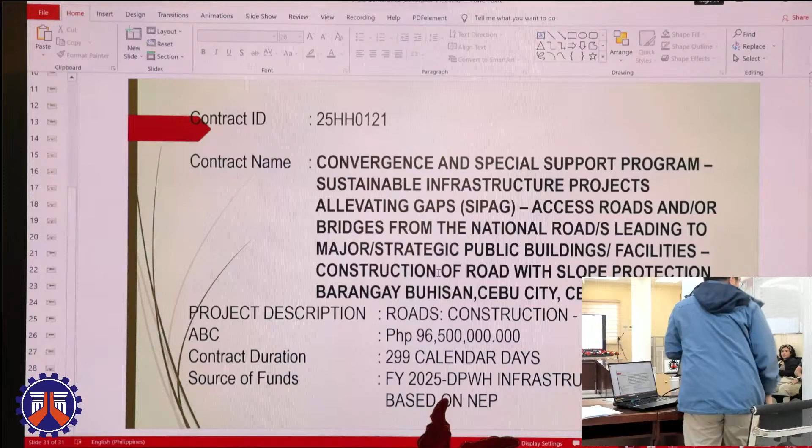Our last project for this pre-bid conference, with a contract ID of 25HH0121, contract name, Convergence and Special Support Program, Sustainable Infrastructure Projects Alleviating Gaps, or SIPAG, Access Roads and/or Bridges from National Roads leading to major strategic public buildings, facilities. Construction of road with slope protection, Barangay Buhisan, Cebu City, Cebu.

Project description, roads, construction, PCCP. The approved budget for the contract, 96,500,000. Our contract duration, 299 calendar days. Source of fund, FY 2025 DPWH Infrastructure Program based on NEP.

Here's our plan. Our project is located at Barangay Buhisan, Cebu City, with station limits from Station 6+400 to Station 6+735, with a net length of 335 meters. The start of our project is about 640 meters from Buhisan Elementary School. This one is our start. And the exact coordinates of our start and end of the project are also provided here.

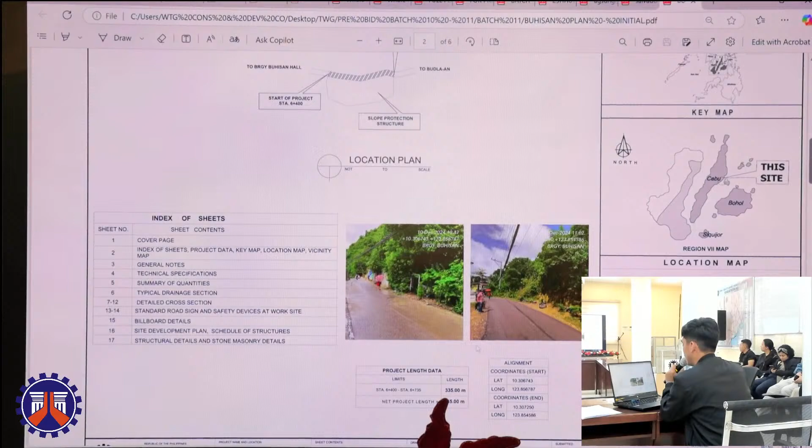Our scope of work involves the removal of PCCP, remove and replace of the concrete pavement, and for our slope protection structure, we have the crib wall. This one, our general notes and technical specifications. And here our typical road section. This one, we have our PCCP pavement. And on the right side, we have our proposed lined canal. And after the lined canal, we have our slope protection structure. This one. And that's all for Barangay Buhisan.

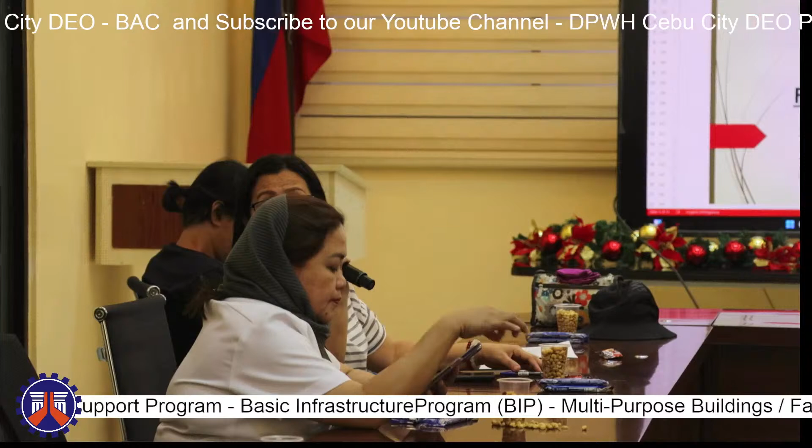Okay, thank you very much, designers. So, do we hear any concerns from the visitors or prospective bidders for this morning? For now, none, but if there will be any before the bidding schedule, you may visit the planning and design section for any further clarifications on the projects that have been discussed. Okay, so from our online viewers, none. Since the reminders for the goods have already been mentioned, we will now hear the reminders for the infra project. So, Engineer Andrew, please.

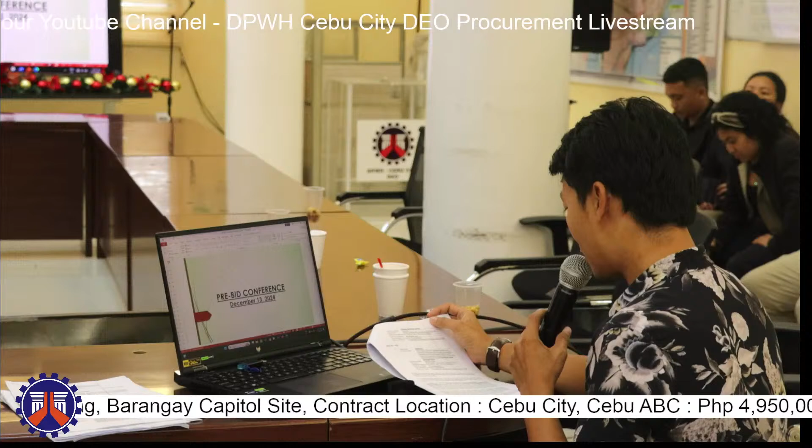Okay. These are just short reminders. Bidding will be conducted through open competitive bidding procedures using non-discretionary pass or fail criteria in the eligibility check, preliminary evaluation of bids, detailed evaluation of bids, post-qualification and award as specified in the 2016 Revised Implementing Rules and Regulations or IRR of Republic Act 9184, otherwise known as the Government Procurement Reform Act. The contract shall be awarded to the lowest calculated responsive bidder who was determined as such during post-qualification.

To be eligible to bid for the contracts, a contractor must have a certificate of registration with PhilGEPS and an approved activation of the BIR electronic filing and payment system, and must meet the following major criteria. A, prior registration with the DPWH. B, Filipino citizen or 75% Filipino-owned partnership or corporation with PCAB license applicable to the type and cost of the contract. C, completion of a similar contract costing at least 50% of ABC. D, net financial contracting capacity at least equal to ABC. And E, letter of authority for the representative or liaison officer as reflected in the CRC to submit bids.

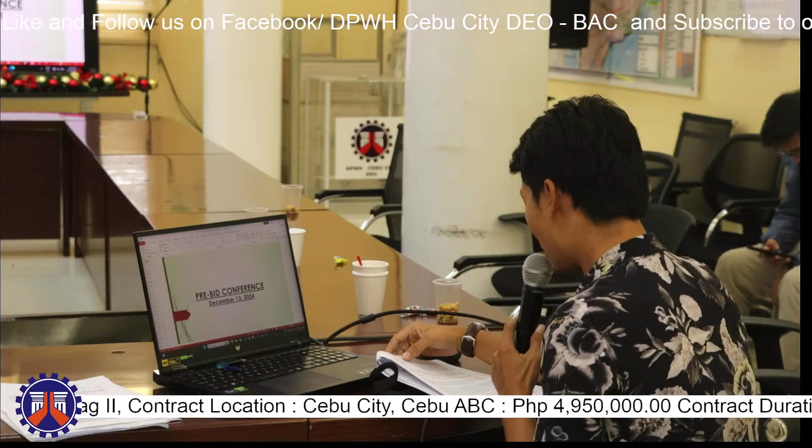Prospective bidders may download the bidding documents if available at the DPWH website and at the Philippine Government Electronic Procurement System or the PhilGEPS. Bidders that will download bidding documents from the DPWH website shall pay the said fees as stated above on or before the submission of their bid documents. The BAC will issue hard copies of the bidding documents at the same address to eligible bidders upon payment of a fee stated above.

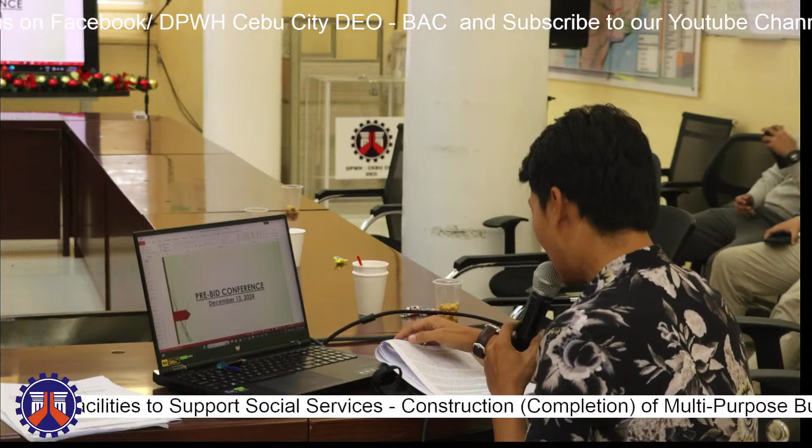As prescribed in Department Order Number 3, Series of 2015, the deadline of submission of contractors' records to the DPWH Civil Works Registry for updating is as follows. A, for Class A documents and financial statements, at least 7 calendar days. And B, technical documents, completed or ongoing projects, at least 15 calendar days before the deadline of the submission or opening of bids. Bid submission may be done manually or electronically. However, bidders should only select one mode of submission, either manual or electronic. Similar to manual submission, the guidelines for the preparation and submission of an electronic bid are contained in the bidding documents. So I think that's all for the additional information for the bidders.

Thank you. And also, may I add, by the time you submit your technical documents and financial documents during the bidding schedule, please ensure that they are properly bound, because some pages might be lost, okay? It's in the guidelines on the submission of your bids, it's in the checklist. So just ensure that, because during submission we have noticed that there are still some participating bidders submitting loose pages. Just ensure they're properly bound.